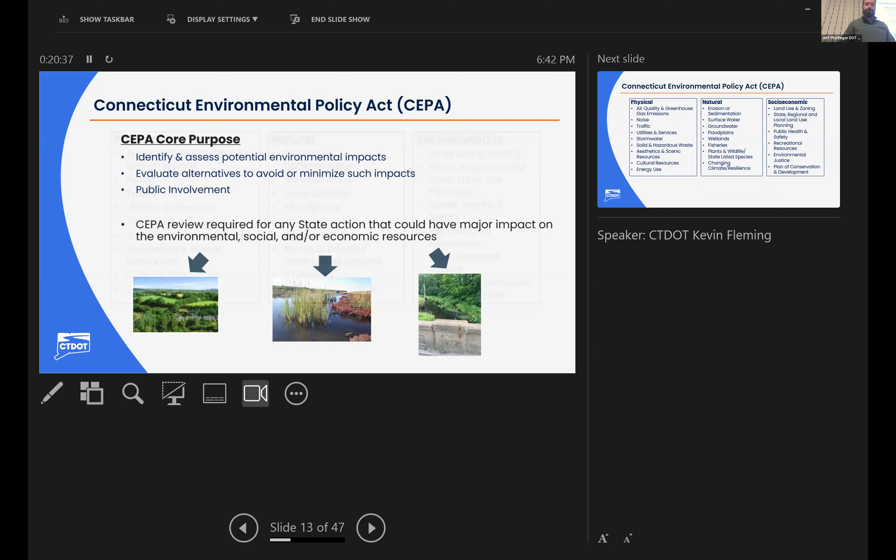As you can see here on the screen, under CEPA we have to consider the impacts that the project may have on a really wide range of environmental resources. Although this isn't necessarily an all-encompassing list, it should give you a pretty good idea of the types of resources that we do have to consider under the Connecticut Environmental Policy Act, everything from impacts to cultural resources and parkland to endangered species and air quality.

Actually, in the case of this project, because it does involve funding through the Federal Highway Administration, or FHWA, we have to ensure compliance with the National Environmental Policy Act, or NEPA, as well.

So now that you have a very high-level, basic general idea of what CEPA is and the resources that we need to consider under it, what exactly is meant by the term scoping? Under CEPA, the term scoping is a very specific definition, and the process involves a defined set of steps for public outreach. The official definition is shown here on the screen, but ultimately it's just basically a way for us to get information from the public, the affected municipalities, and the other state agencies so we can determine the proper level of environmental review and documentation required for a project.

This process begins when we publish a notice of the project in something called the Environmental Monitor, and that kicks off the public comment period for the project.

For those of you who aren't necessarily familiar with what the Environmental Monitor is, I know I certainly wasn't before I started working at the DOT. It's an online publication run by the Connecticut Council on Environmental Quality. It informs the public of all the state actions that go through the CEPA scoping process, so it's like a CEPA clearinghouse of sorts. For this project, we published that scoping notice back on January 20th to kick off the process.

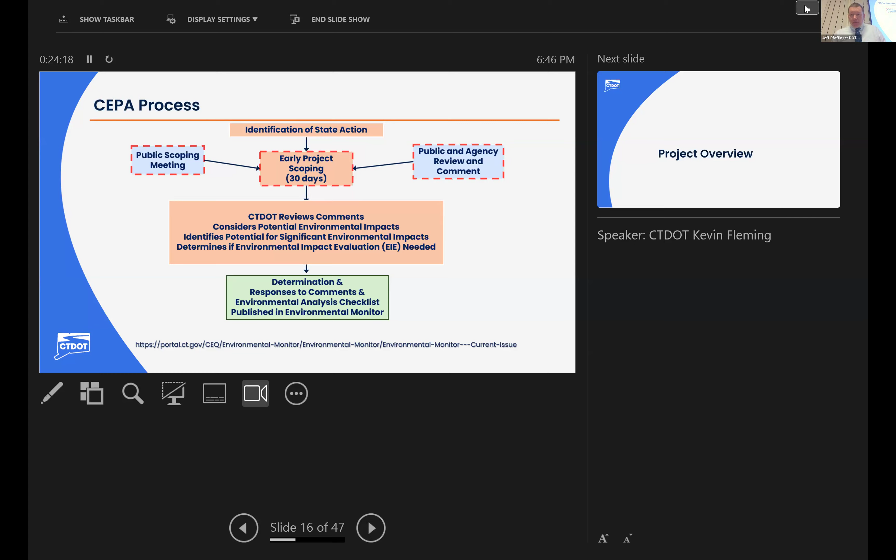All right, let me give a quick project overview. Limits of project 92,689 include just under a mile of Route 15 in the vicinity of Interchange 46, including the entrance and exit ramps, beginning approximately a quarter mile southwest of the bridge carrying Route 15 over Route 63 and extending northeasterly to the opening of the Heroes Tunnel.

Work on Route 69 is generally limited to the area in the vicinity of the northbound entrance and exit ramps, and the work on Route 63 is generally limited to the area in the vicinity of the southbound ramps and in the area of the bridge carrying Route 15 over Route 63.

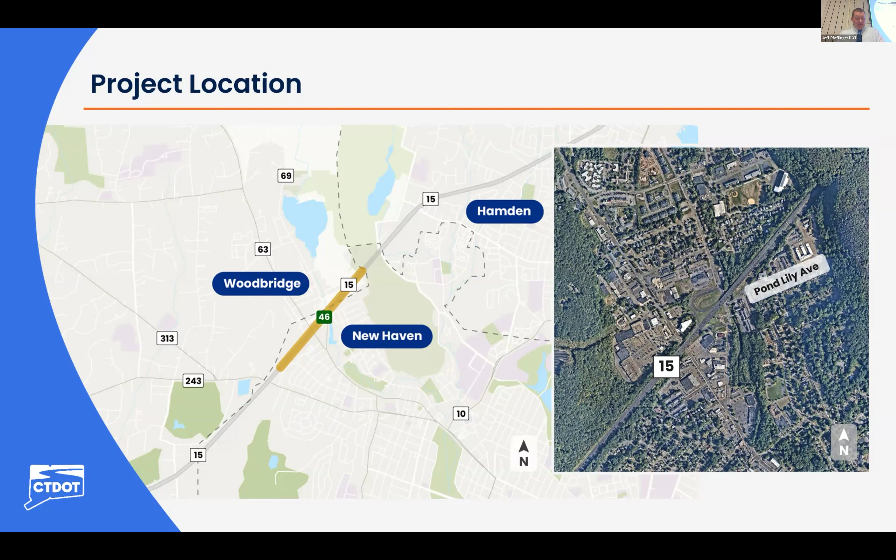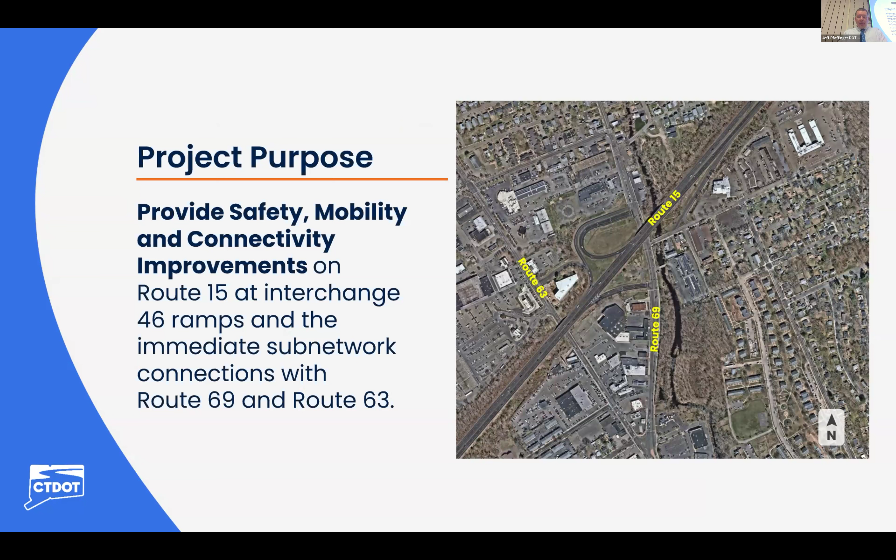The purpose of the project is to provide safety, mobility, and connectivity improvements on Route 15 at Interchange 46 and the immediate subnetwork of connections with Route 69 and Route 63. This project was initiated to address substandard entrance and exit ramps, acceleration and deceleration lane distances, improve geometric conditions to reduce the number of crashes, and improve access to and from Route 15 to the subnetwork.

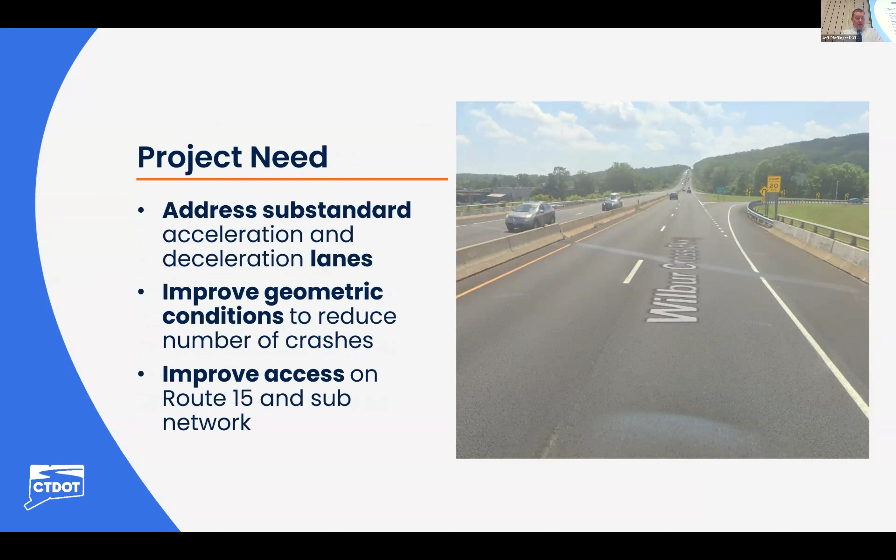Here's some examples of the existing conditions that we're trying to address under the project. Shown below on the left is a picture of the existing southbound off-ramp. The ramp splits off from the Route 15 main line directly into a 20-mile-an-hour curve. In order to safely navigate that curve, motorists need to start slowing down while still in the right lane of the Route 15 main line.

Vehicles braking in mainline traffic cause congestion on Route 15 and can result in safety concerns when vehicles brake unexpectedly or quickly change lanes to avoid vehicles that are slowing down to exit onto the southbound off-ramp.

Also shown on this slide is a picture of the existing stop-controlled southbound on-ramp. This results in similar congestion and safety concerns caused by motorists on the ramp not being able to accelerate up to expressway speeds before merging into mainline traffic.

The gap in traffic required to merge into the main line from this stop condition is much larger than it would be if the on-ramp traffic was able to speed up to expressway speeds before needing to merge in with the traffic on the main line.

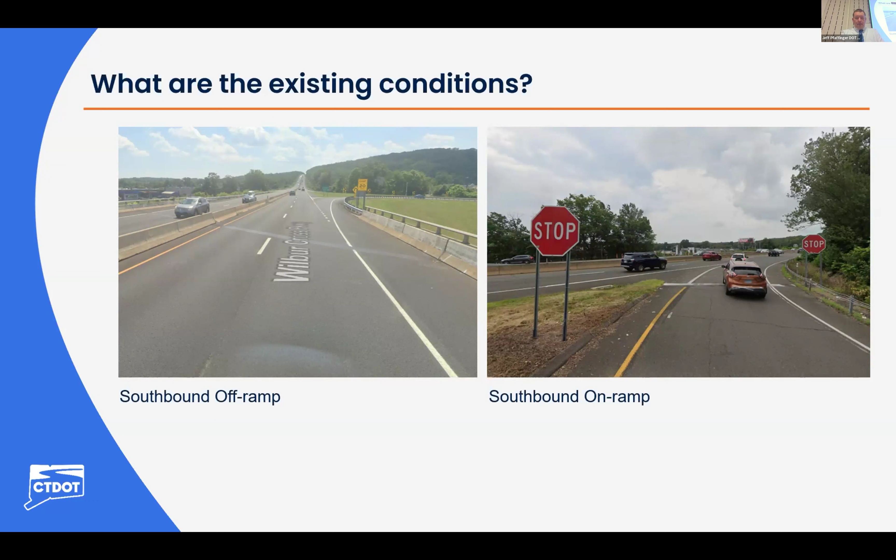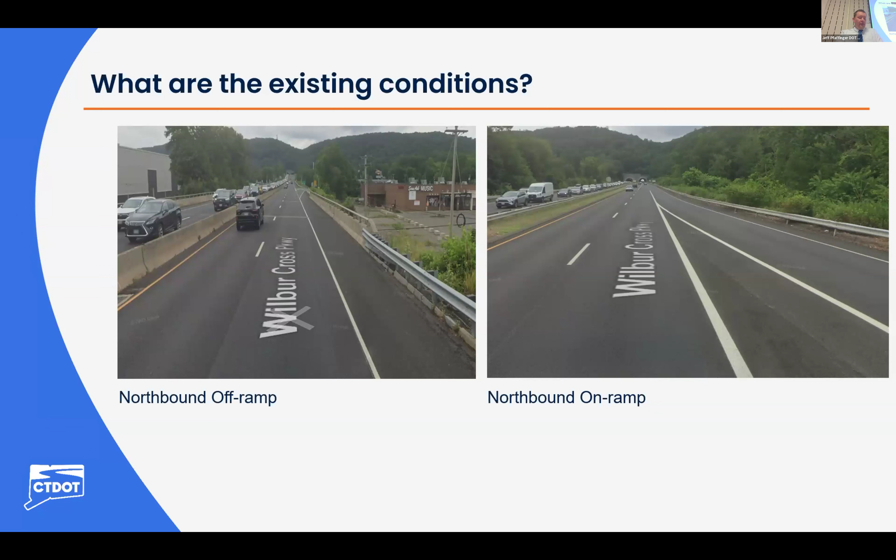Though not as pronounced, similar conditions exist at the northbound ramps. The off-ramp splits off the main line into a 25-mile-an-hour curve, requiring again motorists to begin braking while they're still in mainline traffic. And the on-ramp does not allow motorists to accelerate up to expressway speeds prior to the merge point. There's also limited space to extend the acceleration lane on the northbound side due to its proximity to the Heroes Tunnel entrance.

To discuss proposed improvements to address the conditions that I just described, I'm going to pass this out to our consultant team, led by Bill Anderson at VHB.

All right, thank you, Jeff. Again, my name is Bill Anderson. I'm the project manager with VHB for this project, and here are my consultant team.

So to address the needs identified by Jeff, we're proposing 5 major improvements for this project. The first is to provide acceleration and deceleration lanes that meet design standards. The second is to add a loop ramp from Route 69 to connect to Route 15 northbound, and in turn closing the Pond Lily Avenue ramp.

The third is to replace the bridge over Route 63 to facilitate the construction of the southbound on-ramp and northbound off-ramp. The fourth is to replace the superstructure on the bridge over Route 69 and the West River to facilitate the northbound on-ramp and southbound off-ramp and deceleration lane.

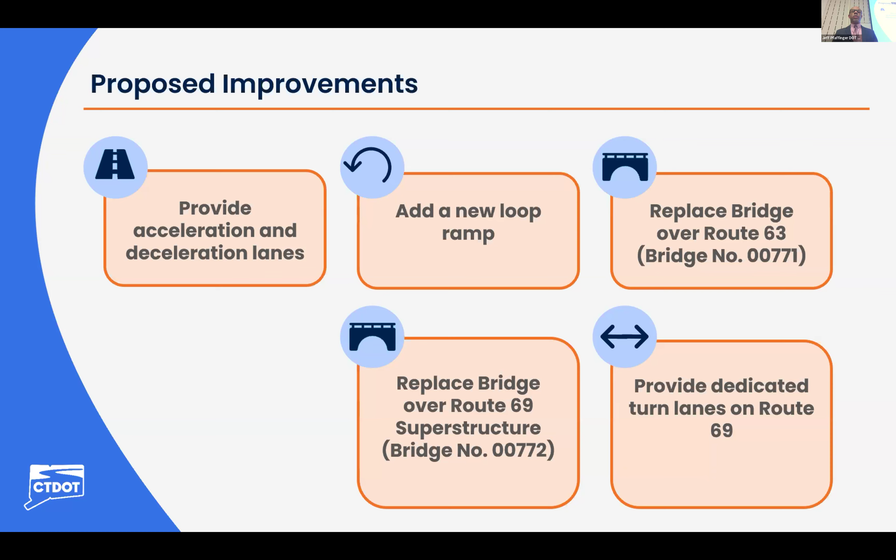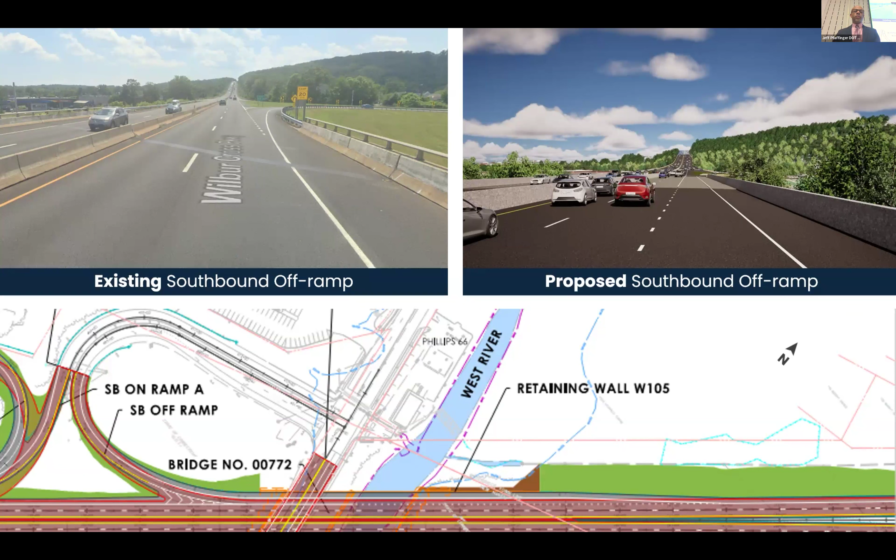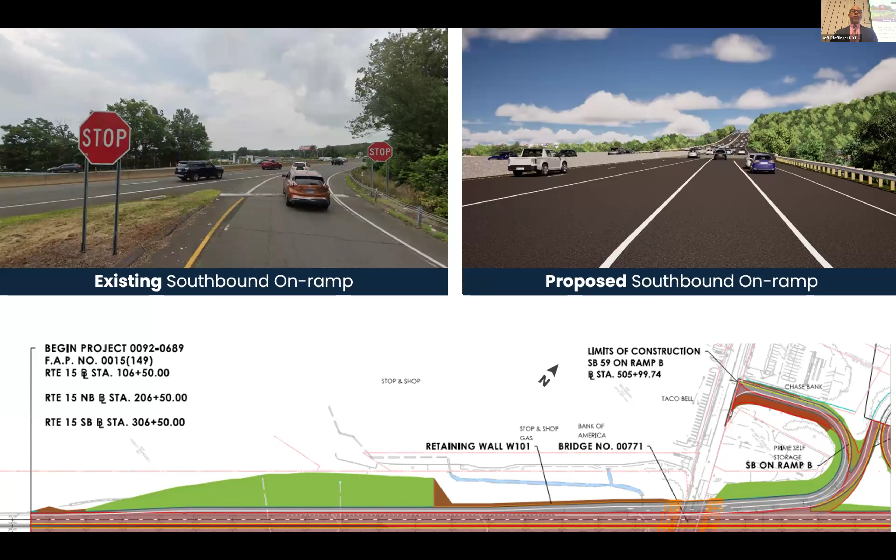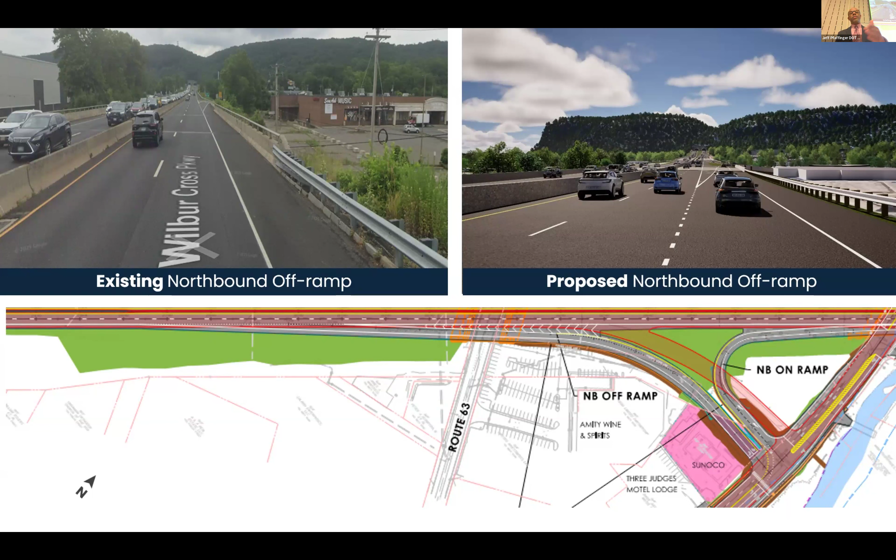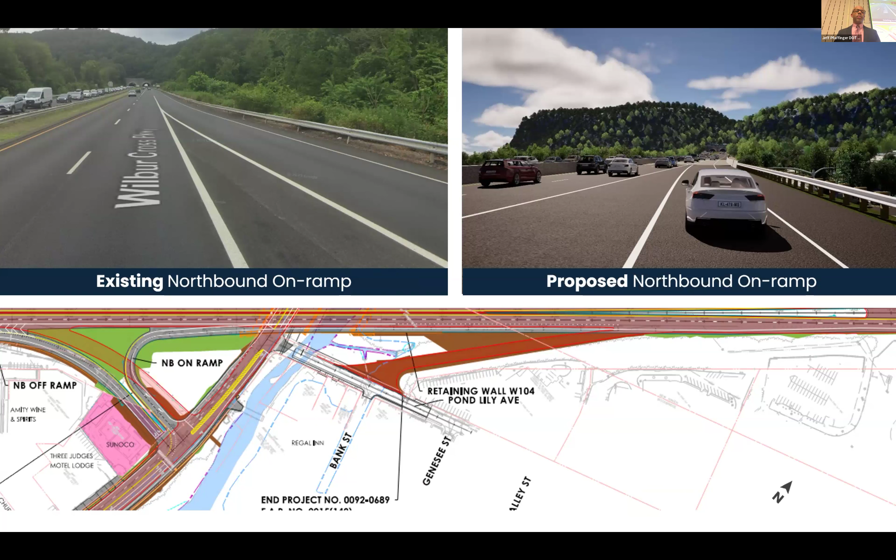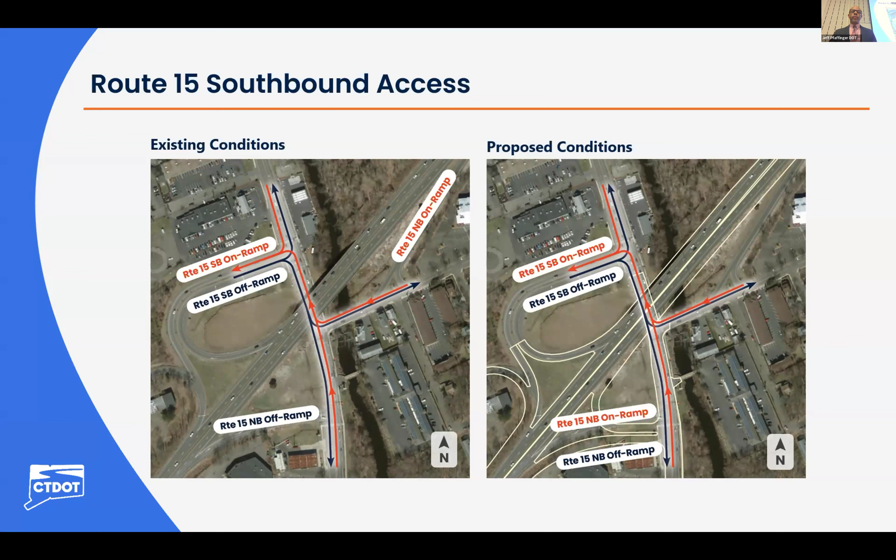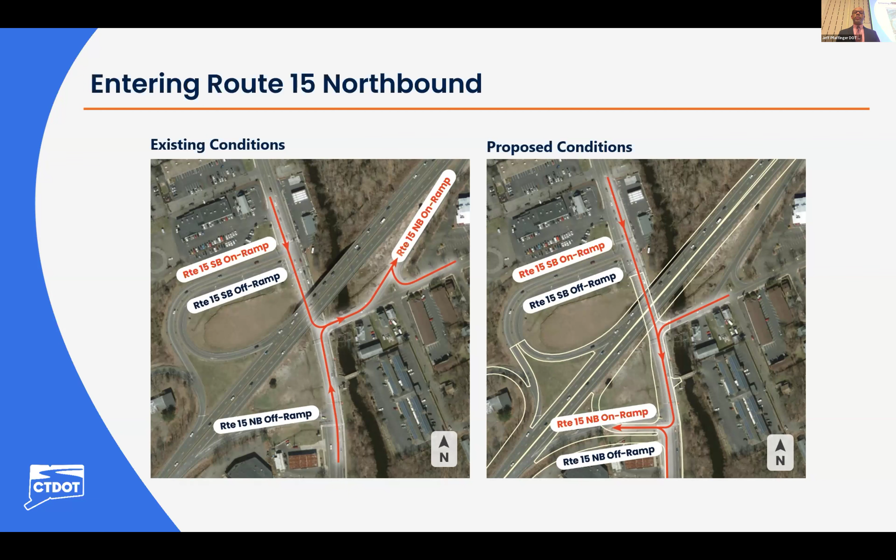Another change, sure.

No, it's not. No, that's all good. Appreciate it. We good with the display?

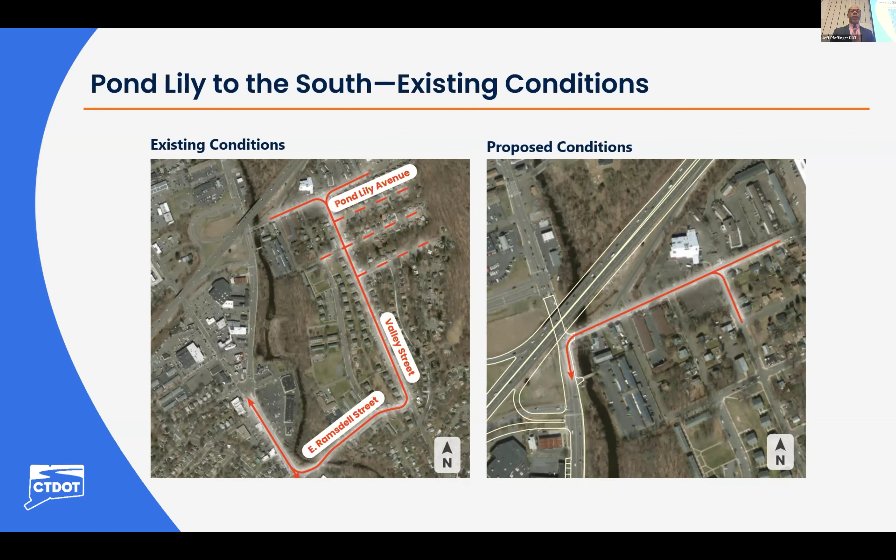So in summarizing the impacts of these improvements: the ramp modification will improve local traffic patterns. It'll be more convenient to access south on Route 69 from Pond Lily Avenue, and we anticipate a reduction in traffic on Valley Street and the surrounding neighborhood streets.

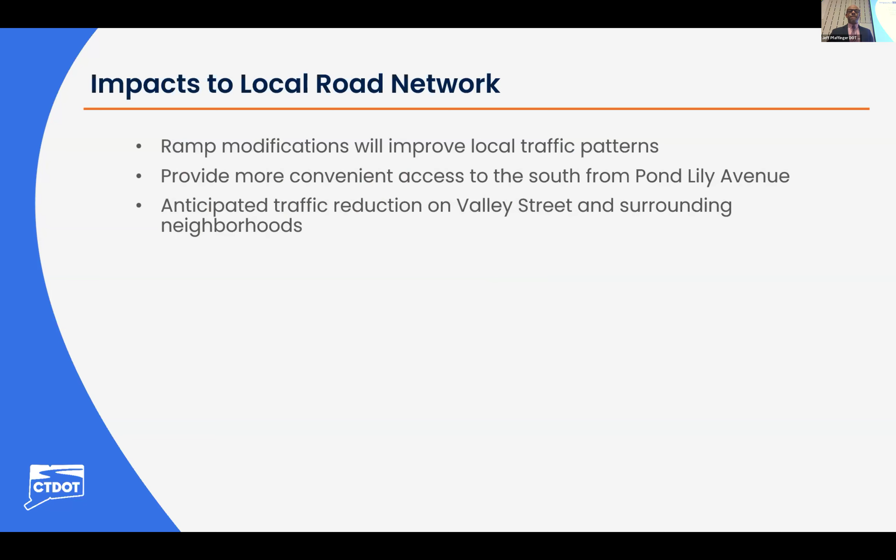So what to expect during construction in terms of lane closures and any change in traffic pattern. Let's begin with Route 15. During normal peak hours, which is 6 a.m. to 6 p.m., we anticipate providing 2 lanes of traffic in each direction, as there is out there today.

We anticipate during nighttime work, between say 7 p.m. and 5 a.m., there will be some lane closures.

On the ramps, during peak hours, which is 6 a.m. to 9 a.m. and then 3 to 6 p.m., we expect the ramps to remain open. During nighttime work, there might be some temporary lane closures on the ramps.

On Route 69, during peak hours, 6 a.m. to 9 a.m. and then 3 to 6 p.m., we anticipate traffic as it is out there today. During work hours, we'll be requiring the contractor to maintain at least 1 lane in each direction.

The limitations of operation noted for Route 69 will be the same for all the other local roadways, including Pond Lily Avenue. The contractor will be required to maintain access to commercial and residential driveways during construction. If for any reason the contractor needs to temporarily close a driveway, he or she will be required to coordinate with the property owner.

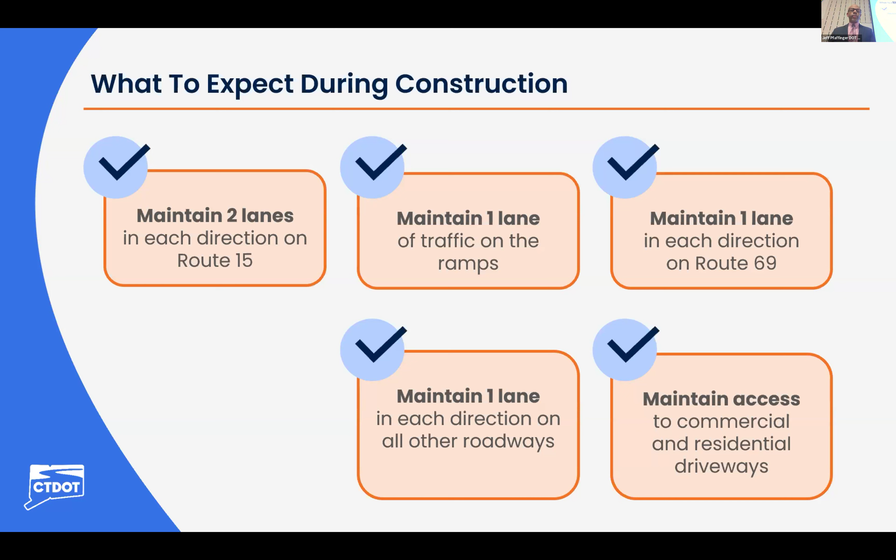Here's a basic illustration of the traffic pattern on Route 15 during construction. During normal peak hours, what we anticipate is providing 2 lanes in each direction.

The orange areas shaded in are work areas. Essentially, they would shift traffic over to the left heading north, to the right heading south, and then do the work in the right shoulder heading north.

For the next phase, the area previously built on from the prior phase will have northbound traffic placed on it, maintaining southbound traffic on the existing pavement section, while doing work in the middle of the roadway.

The next phase will essentially maintain the northbound traffic as is, and then shift the southbound traffic into the new construction section from the previous phase, doing work on the western portion of the roadway.

The next phase again shifts traffic around. For the first phase, we looked to build some temporary pavement. This phase shows shifting traffic to still provide 2 lanes in each direction, with final construction in the right shoulder heading north, removing the temporary pavement and completing any final construction required.

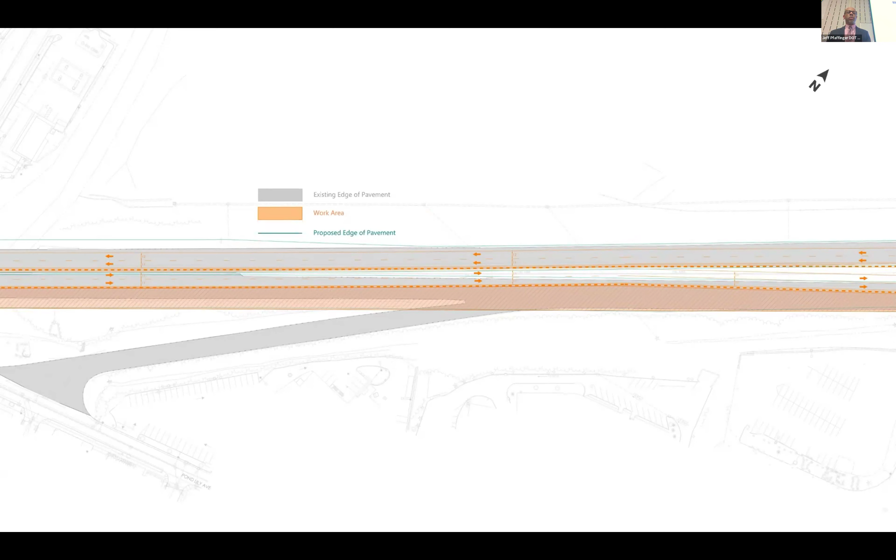This project will have some right-of-way impact. One total acquisition has been identified so far, at the Sunoco gas station at the intersection of the northbound off-ramp and Route 69.

We have also identified 2 partial acquisitions, 5 drainage right-of-way requirements, and 6 rights to reconstruct parking lots and driveways along the Route 69 area, plus one easement for grading along Route 69.

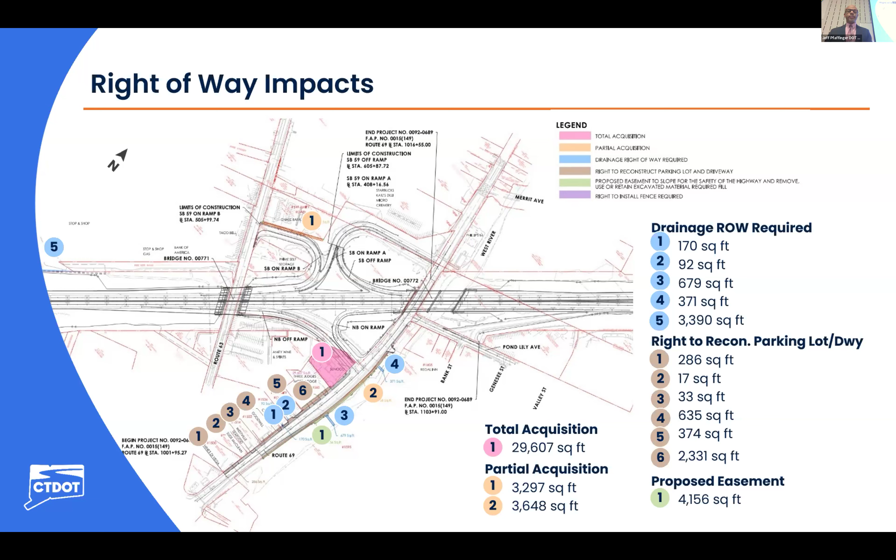I'll turn it over to Zach for him to go over the right-of-way process.

Thanks, Jeff. My name is Zach Carino from the Department's Division of Rights of Way. Our unit is responsible for acquiring the property rights needed for the project. Several property rights will be acquired, so I'll give a brief overview of our acquisition process and what you can expect from the department if you're one of the impacted property owners.

All property acquisitions will be in accordance with Connecticut General Statute sections 13a-73 and 13a-90e, as well as the Uniform Act. The acquisition process begins with meeting with each of the impacted property owners.

In the case of the Sunoco gas station, we've already met with them. We'll go over the project and explain the impacts to the property, and we'll also prepare a property map showing the property rights we're proposing to acquire.

We'll begin negotiations with the property owner and give them time to consider our offer. If we can come to an agreement, the department will pay the property owner directly and handle the closing.

If we're unable to come to an agreement, the department will acquire the property rights through its power of eminent domain and deposit the original offer amount into the court system. The owner would have 6 months from that date to file an appeal if they felt the offer was inadequate. These impacts are still subject to change as the design progresses.

If there are any questions regarding the right-of-way acquisition process, or if you are one of the impacted property owners, we can answer questions in the Q&A. With that, I'll hand it back over to Jeff. Thank you.

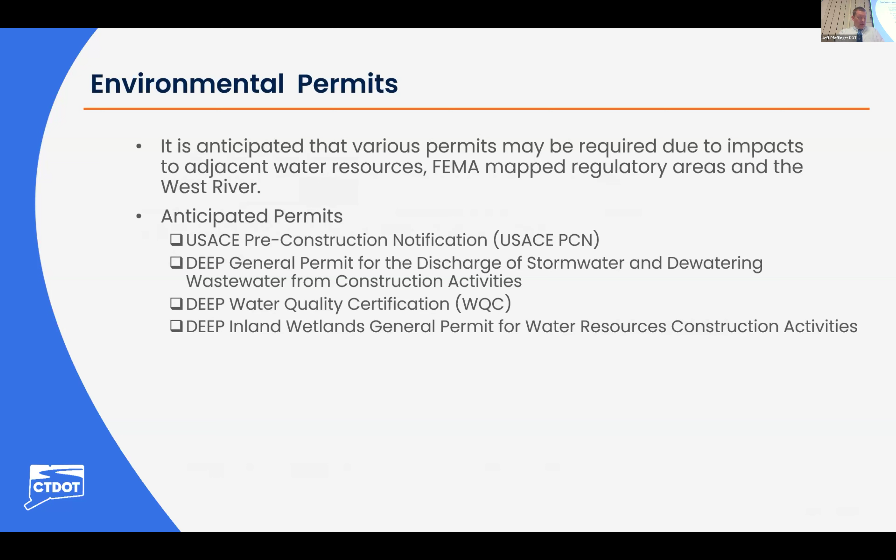The current cost estimate based on the preliminary design is approximately $90 million, with 80% of that funding coming from the Federal Highway Administration and 20% coming from the state of Connecticut.

For the project schedule, we completed the preliminary design last summer. We are looking to begin final design, permitting, and rights-of-way coordination starting in the spring of this year, with a design completion date targeted in the fall of 2027, resulting in a construction start in the spring of 2028. We expect a construction duration of approximately 3 years.

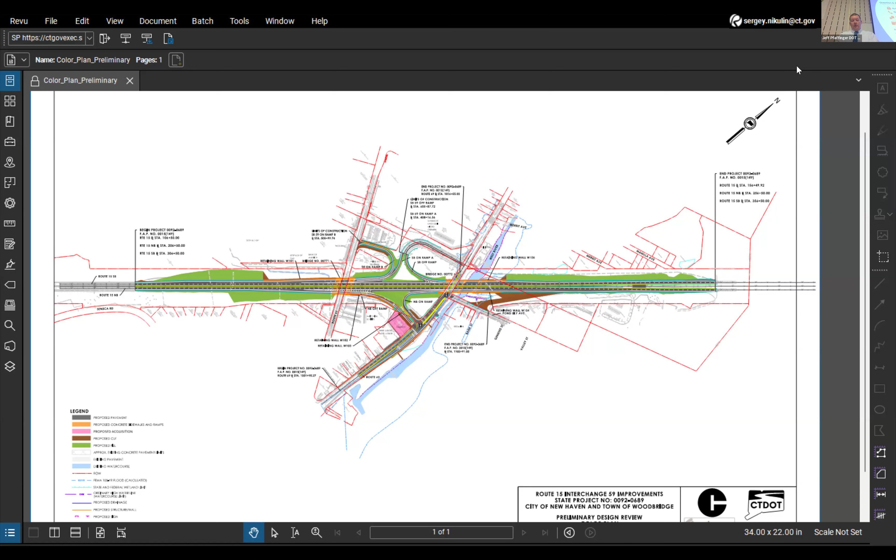So I mentioned that we're not changing the horizontal clearance under the bridge. The curb line of Route 69 underneath the Route 15 bridge isn't changing. The work we're doing on that bridge is just widening the top side, so we're not changing any of the horizontal clearances under the bridge, which I believe will still leave plenty of space underneath to add the trail at a future date.

Yes, this has come up a few times. This was brought up in our previous coordination, and it is our goal for the project not to impact the space that's currently available for that trail to get underneath the bridge.

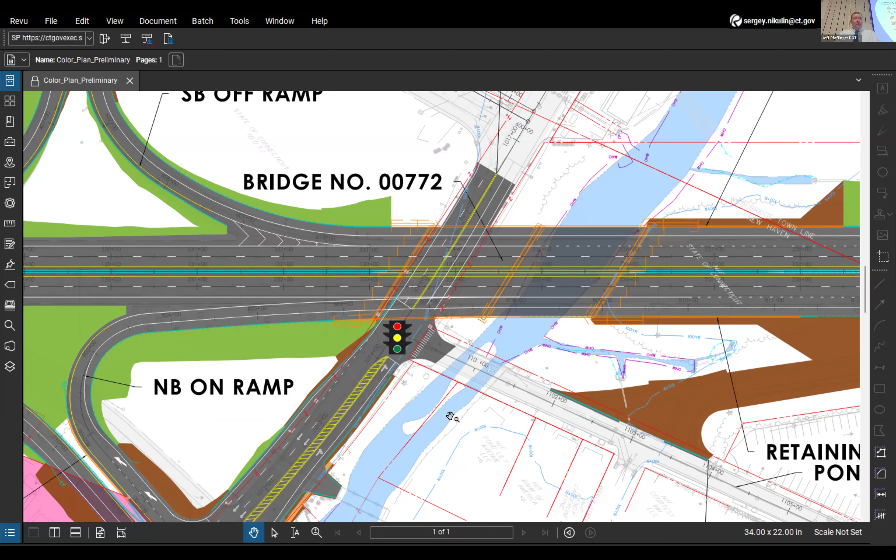Next question: there are many individuals using the bridges and adjacent area for building tents and taking shelter. Is the department considering designs to minimize such tent building?

This being a transportation project, I would say that eliminating space for people using the bridges for shelter is not necessarily the goal of the project.

Prior to construction, we will be providing alternative housing or relocating people who would be in conflict with construction of the project. We are aware that this is an issue down there. There is also going to be some brush cleared out as part of the project, related to the relocation of the curb lines on Route 69 and the widening of the bridge carrying Route 15 over Route 69.

Which may make that area a little bit less desirable, I'd say, because it will end up being a little bit clearer in the after portion. But yeah, pre-project, we do address the people who shelter under the bridges, essentially to remove them prior to construction.